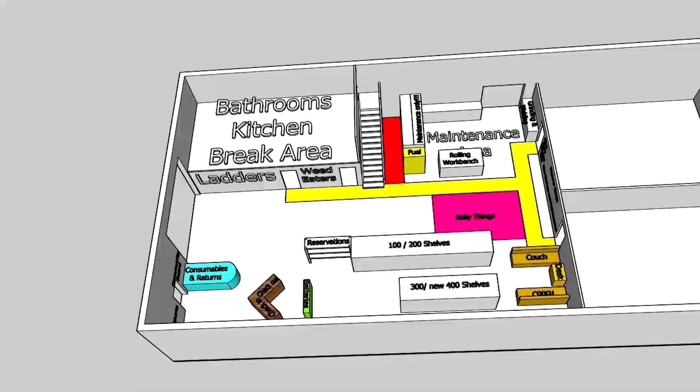If you've been to the Asheville Tool Library, this might look familiar. I used SketchUp to help us map out our initial design plan when we moved in October of 2022. I started using SketchUp about 15 years ago as a general contractor to help clients envision what we were talking about building. Here's a garden shed with a super cute circle window I built a few years ago. SketchUp is just awesome for bringing your ideas to life.

After doing a 3D drawing, I usually export the model to the companion program called LayOut to create construction drawings that can be used on site. You can also create scenes, which are particular views that show and hide whatever you want, and then link them all together to export an animation like these.

This is a prefab shed we converted to be a guest apartment above a storage space a few years ago. I didn't draw the car, but was able to import a standard SUV from the SketchUp 3D warehouse to help give a sense of scale. Here's a house out in Marshall, built in a week-long intensive tiny house building class.

I color-coded everything and used that on the cut sheet to make it easy for everyone to keep busy and know where things went.

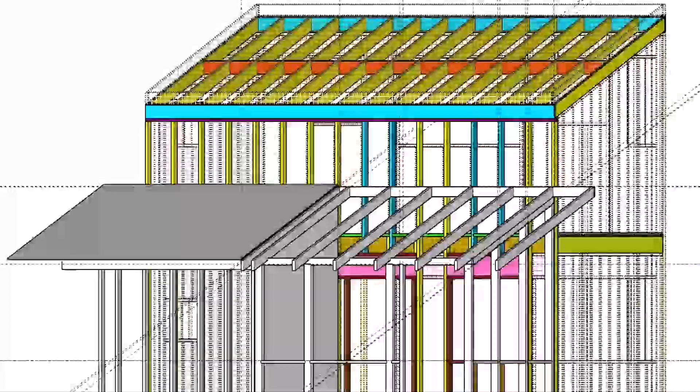And then I got into car racing and decided to use SketchUp to play around with some custom fabrication. I wanted some stronger parts for my rear suspension, so I mapped out the existing geometry, used that to inform and design the new components, flattened the pieces with a plug-in program called Flattery, and sent those to a plasma cutter after nesting as many as I could into a single sheet of 11 gauge steel.

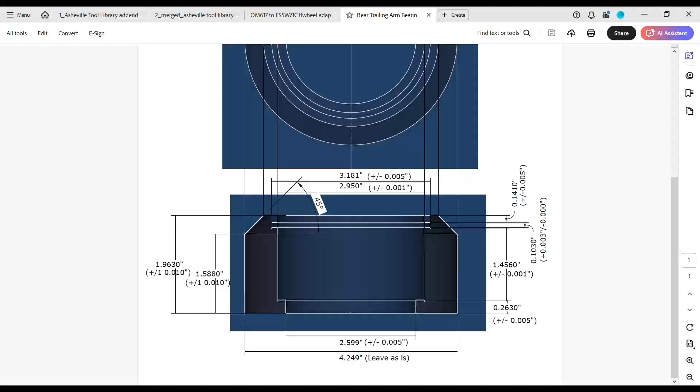I also had to design a wheel bearing holder that I had a local machine shop make for me. This is my first time doing something so oddly shaped, so I was very happy that it all came together as expected, and even better, has withstood tons of abuse. Here it is going off that jump.

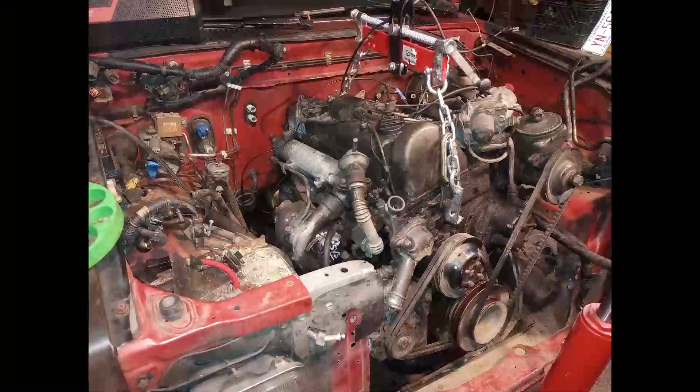Another very weird ongoing project I've got is swapping a 5-cylinder Mercedes turbo diesel engine into my Nissan hardbody, but keeping the original transmission and drivetrain.

So here is the flywheel adapter to get from the new engine to the existing transmission's flywheel. Basically, if you can imagine it, you can probably draw it in SketchUp and bring it to reality. As challenging as it can feel to work things out on the computer, it's so much easier and cheaper than doing it for real. You can use it to walk through all the steps and see what issues you might encounter.

So I'm going to start working off the outline here.

There's SketchUp Free, which is probably what most of y'all have opened up. The desktop version comes in a few flavors, from $150 to 350, up to 750 bucks. I think the free version is great for just starting to play around with it, but you've got a lot more capabilities with the more expensive versions.

They do offer that highest tier, called SketchUp Studio, which usually costs about $750, to qualified teachers and students for 55 bucks. That's the level I'm using. There's a lot of plugins and additional programs that come with that I'm not even using, but depending on what you're doing, you may want to.

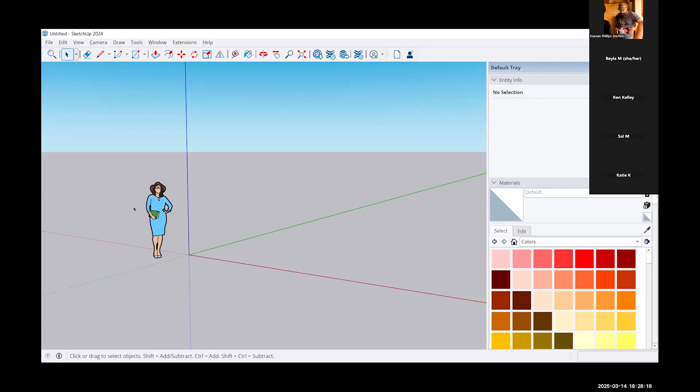They usually will put a model here near the center point of all the X, Y, and Z axes for you. I usually leave that until I've got something else drawn and then delete that, but it can be cool for a sense of scale if you want to have that.

So the first tool that we're going to use will be the rectangle tool. You can also use it to draw squares. The keyboard shortcut is R, for rectangle. I'm just going to go start right at what's called the origin, where all three of those axes come together, and click on that.

I'm going to click and release and then start pulling away, and you'll see I can move my mouse around. If you look in the bottom right corner, you'll see the dimensions, one number and then a comma and then another number. You can try pulling this out to exactly what you want, or once you've gotten it pulled out, like if I want a long rectangle, I'll usually kind of make it look like a long rectangle. So I can see that that first number is 46 feet and the second one is 9 feet.

So that 46 feet is kind of like my left to right dimension. I've clicked and released and pulled over in this direction, and then you can just start typing. So I'm just going to type like 40 feet, comma, 10 feet. And that's going to make a rectangle that is exactly 40 feet by 10 feet.

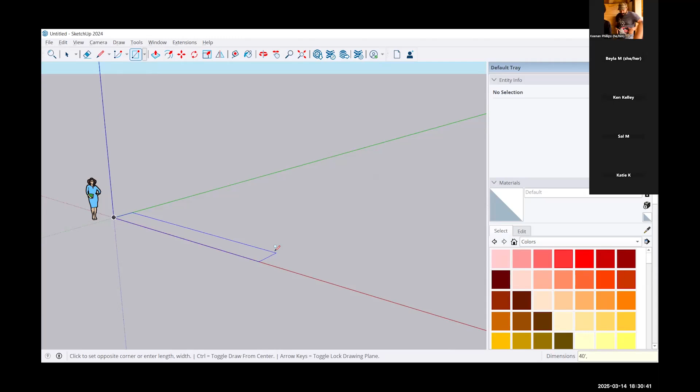Yes, Robin. Click and release is way better. If you click and start dragging out and you accidentally release, it's gonna lock to what you were doing. But actually that can work out. Let me undo. So if I were to click, drag, and I didn't mean to go there, you should be able to still type in your dimensions and get where you wanted to end up with that 40-foot by 10-foot rectangle.

All right, so that's the rectangle tool, and R is the keyboard shortcut for that. So the next thing we're gonna do—it's not letting you type in the measurements. Are you on the free version, and are you able to see that bar down there?

Maybe they have changed that. I'll try, see if my internet will allow me to. Oh yeah, they've changed it. Well, shoot. It's not super critical to do exact dimensions for what we're doing today. Just draw a rectangle that's kind of roughly in that same orientation, or you can draw a square or a rectangle in the other orientation. It actually won't matter too much.

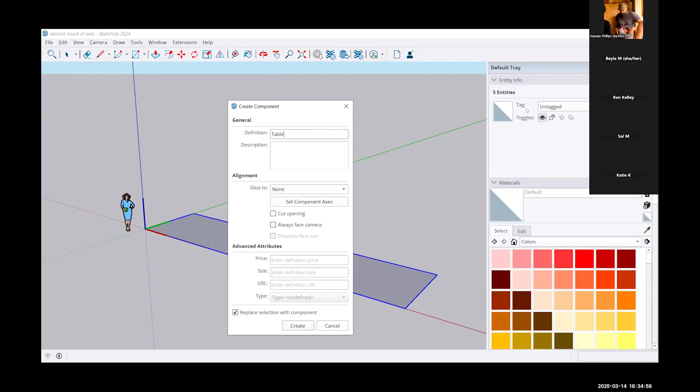So what you've got over to the side here might look a little different with the online version. I think the last time I tried the online version, several years ago, they didn't have this thing called the outliner—they were only allowing tags. The outliner is definitely a super helpful part of the desktop version. Once you start getting more complicated with models, it's very nice to see things broken out kind of in outline fashion.

At this point, I'm going to go ahead and delete that model. So I have two options: one is to just click it over here in the outliner, the other is to click and drag over that model.

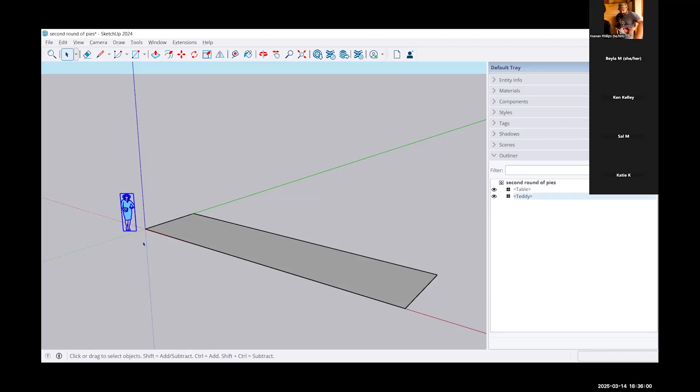Click and drag is another interesting tool. If you click and drag from the left, it's only going to select everything that's within that rectangle that you made—like if I've partially got our rectangle table in there, it doesn't do anything. If you click and drag from the right, you'll see dotted lines instead of solid lines, and it's going to select anything that's partially within that rectangle. So now it's selecting both things.

So I just want to get rid of Teddy. I'll highlight them and then use the backspace key—or maybe it's delete. Yep, delete. And now I'm going to save just to make sure, but you probably don't need to do that because you're online.

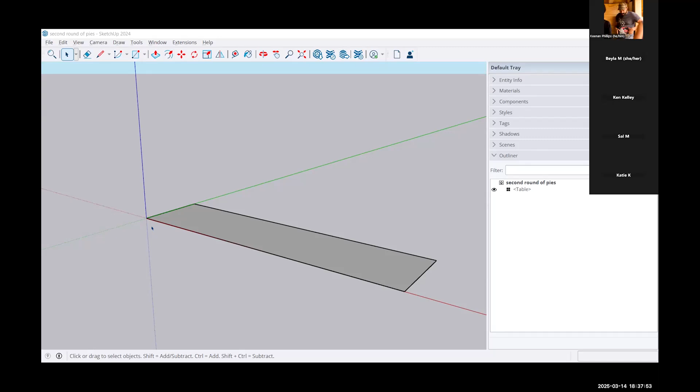So the next tool we'll use is called the Orbit tool. Keyboard shortcut for that is O. When you do that, you'll see the cursor change to this little vertical line with a red arrow around it. Something that's really awesome about the trackball mouse is I don't have to hit O to get to this tool—I actually just click on the scroll wheel, and that automatically takes it to orbit mode.

Then I just move the trackball and I'm able to do what they call orbiting, just kind of move all around—way easier on the trackball. This is probably one of the biggest advantages of the trackball, being able to quickly move around your model. This would take so much longer with the trackpad.

So yeah, you can hit O, and with the trackpad, I believe you have to click and hold, and then you start moving around on the trackpad.

So we should go ahead and create a scene just so we don't accidentally get lost in outer space and have a hard time getting back here. I've got it over to the right in my default tray. You may need to go up along the top of your window to see—I think it's going to be in the tools.

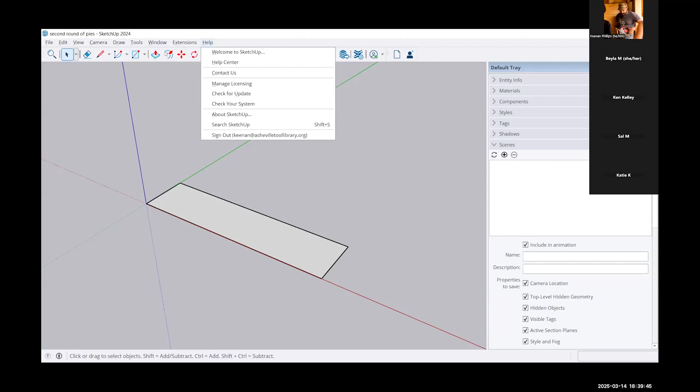I'm sorry, I always use the tray for doing things. I pretty much never use these drop downs or the tool selection along the top edge. Yeah, maybe it has to come from the tray. So over in the tray underneath scenes, I'm just going to click that plus button, and it's created scene one.

Is anybody other than Joseph able to see my screen? It says I'm screen sharing. Okay, I don't know what's going on, Joseph, but most other people are saying they can't see it.

Let me try opening the online version. It was going really slowly for me earlier today. Give it a few more seconds here. Okay, maybe it'll work.

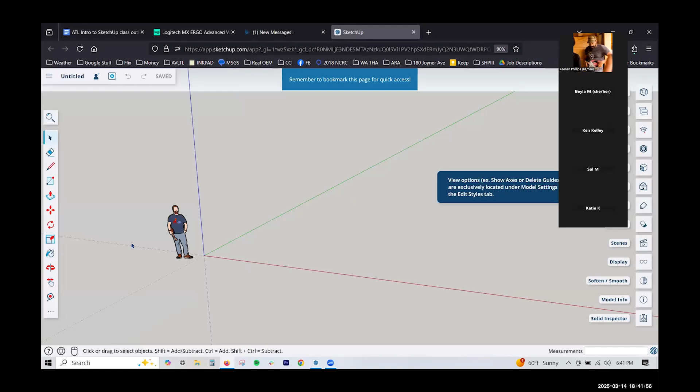Okay, I got somebody with a dinosaur shirt and a ukulele. That's a cool model.

Okay, so gonna try doing what we did before. That did allow me to type in the measurements. I know somebody else said it wasn't allowing them to.

Matthew's saying they also couldn't type in the measurements. Yeah, totally, just let me do that.

Maybe if you're actually trying to go over to that open cell and click there, that might have been the problem.

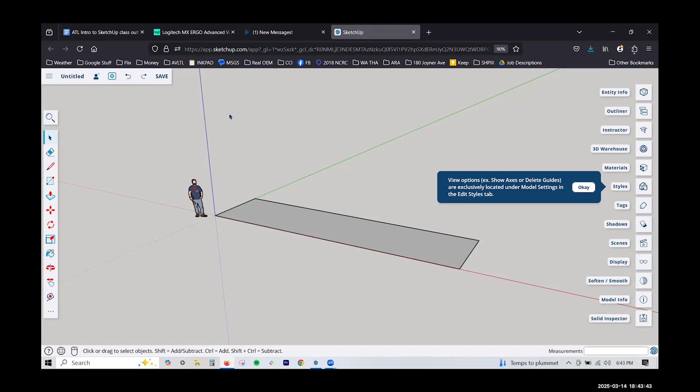It's weird, I'm also not getting that upgrade button, and it doesn't look like I'm logged in or anything. But like I said, it won't be a big deal if you aren't doing these exact dimensions, at least for the exercise we're doing today.

Okay, so orbiting, we made it an individual component. So once something's been made an individual component, if we wanted to draw a rectangle that's actually attached to it, we can't just hit R for rectangle and start drawing on it. Those aren't actually going to stick to each other.

We'll actually have to click into it. So I usually will triple click. Oh yeah, I undid it - that's why it's not a component.

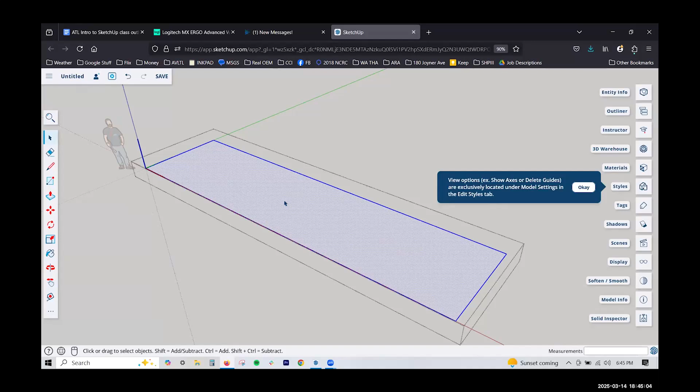So once it's become a component and you triple click on it, you'll see kind of these dotted lines of a cube form around something, and that lets you know you're actually drawing on that thing. So anything you draw on that will be stuck to that object.

So I actually don't want that because we're trying to make some pies that are going to sit on top of the table. And if we want to move the pies around, we don't want the table to also be stuck to them and moving with it.

Okay, Katie was saying it's a little counterintuitive maybe to not try to click into that box where the dimensions are.

All you do is you hit R for the rectangle tool, click and release, and then start moving out wherever you want. Then you just start typing the dimensions. You don't click on that box at all, but they'll pop up in that little dimension box. Katie was saying that worked for them, so maybe try that if you're having issues.

So the next tool we're going to use will be the tape measure. It can be good to actually get a measurement between some particular things. I use it a lot, especially early on, for just making what are called guidelines. To get to the tape measure tool, we'll press T and it should pop up with a little tape measure.

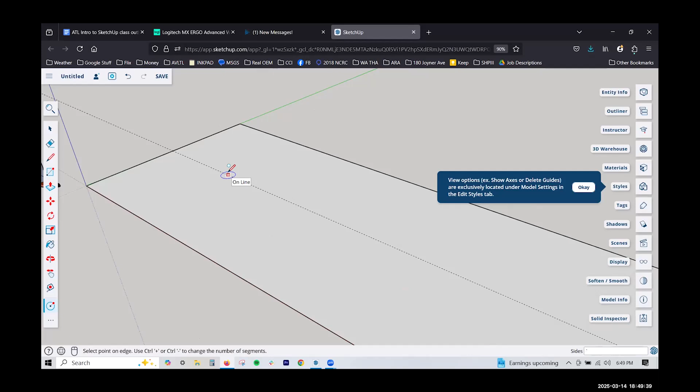Let's just click some random location. So I'm always pretty much always doing the click and release. I've got the circle tool, click and release on the center line, and then you can start moving around. You see how that line from the center is green right now? That lets me know that I'm lined up to the green axis. Not important in this scenario, but it'll become important a little more later.

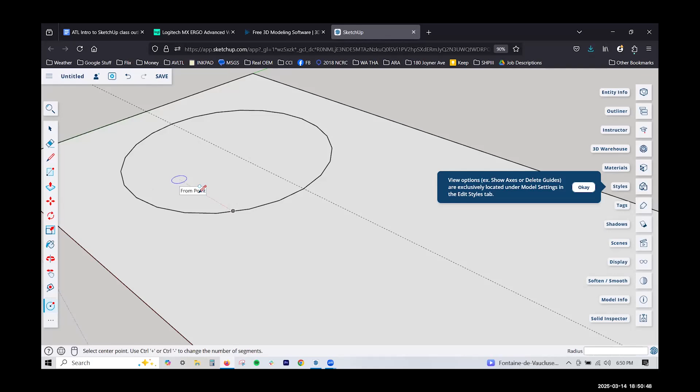So I'm just going to do some random size, it actually doesn't matter. You might notice this circle has some really rough edges to it. Something that SketchUp does to keep things running quickly, especially if you don't have really good graphics processing on your computer, everything is actually made up of a bunch of line segments and little planes as you start getting into shapes. So the less lines it has, the less work there is to do as far as video and graphic processing.

But I want this pie to look pretty good, and that just doesn't look good to me. So I'm gonna hit spacebar to get to the pointer tool. I'm gonna click on the edge of that circle, and it will highlight that circle all the way around. And then I'm gonna click entity info, so it's going to tell you information about whatever you're clicked on.

So if I wanted to change the radius of this circle from 3 foot 1 9/16 of an inch to just 3 foot, it's pretty easy to adjust it here. Just do 3 foot, hit enter.

So that resized it. The segments are the number of lines making up that outer edge. Right now it's got 24. I'm gonna make it, multiply that by 4, so do 96, and you'll see it get a lot smoother. It's still made up of a bunch of lines, but there's 4 times as many. So things got smooth enough that I think it's at least pleasing to the eye.

Oh, so Joseph, to turn the rectangle into a component, you're gonna hit the space bar to get to the pointer tool, and then you'll double click on the rectangle, and then you press G, and it should pop up a little window saying make component. You can type in whatever name you want to use, and then hit enter.

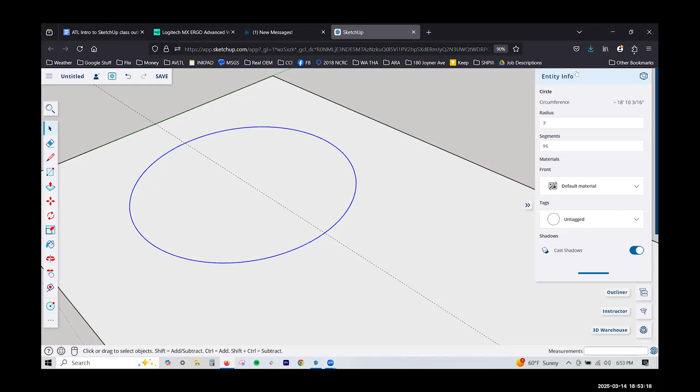Let's actually use the push pull tool next. So to get to the push pull tool, we'll hit P on the keyboard, and we should see this little square with some shape to it and then an up arrow. As you hover over things, it'll highlight them. So now I can see that I'm going to be pushing or pulling that shape that is the circle.

So I'm just going to click and release and then start moving up, and so we start to get some shape. I want this to look kind of pie-like, so I'm going to go about there. That seems to be about the proper proportions.

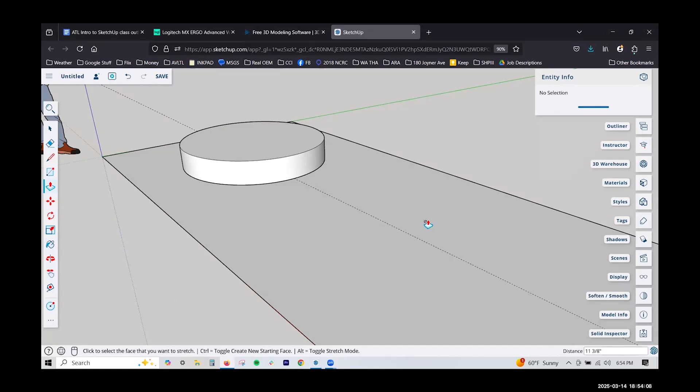Give you a few seconds to make sure everybody's keeping up with that. So that doesn't really look like a pie though. We want that upper edge wider, at least not what I imagine as a pie. You could have a pie in that shape, I'm sure it would taste great still, but I want that upper circle to be a little bit wider.

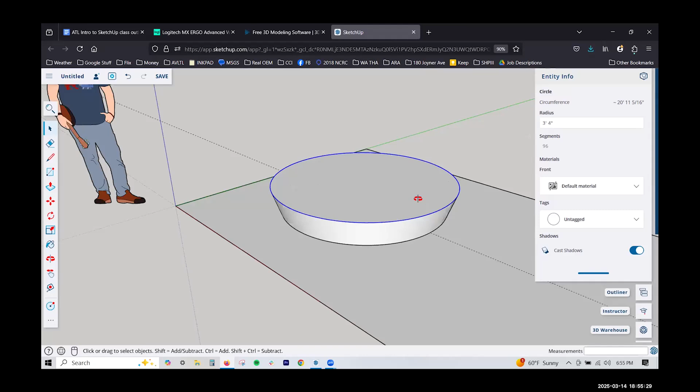So we're going to hit space bar again, and we're just going to click on that upper edge. You should see only that upper edge turn blue, and that lower edge should still remain black. Your entity info window might still be open, but if it's not, you can just click the entity info tool over to the right, and what we're going to do is adjust the radius. Right now the radius is 3 feet, which is like 36 inches, so I'm going to try 40 inches. I think that looks pretty good. So whatever measurement you had there, you can just add a little bit to it so you get some kind of angled shape that you like.

Joseph, make sure you're seeing the upper circle highlighted in blue. If you're not clicked on anything, the entity info will just say no selection. So make sure you're clicked on that upper circle of our little flattened cylinder.

Make sure it says circle in the entity info. Anybody else having issue with adjusting the upper circle radius?

So if it says face, what you've got highlighted is, if you can look at my screen share, the center of the circle. So you have to move that pointer till you're actually clicked on the edge, it's just going to be a single click. If you double click that edge, now it's highlighting the whole thing for me, or if you double click in the middle, you'll get those dots in the middle of the circle, but also around the edge. What you have to do is just click that edge. This can be tricky sometimes in SketchUp, clicking, especially since the edges are so thin, so I'll usually, if I'm having a hard time, zoom in really close to make sure I'm only getting a highlight of that circle.

Krista, were you saying it's kind of working or kind of not working?

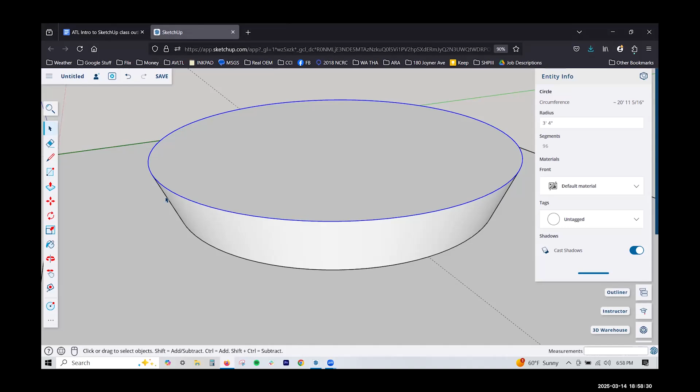Okay, cool. So let's see, what should we do next?

Oh, we are going to do the offset tool because my favorite part of pie is the crust. I mean, it's got to have a good filling, but it needs a good crust, especially sticking up over the edges there. So actually, before I get too much further, I think I might not have even made a scene.

Yep, I didn't even make a scene yet, so I'm going to make a scene so I don't accidentally get lost, and then I'm going to make this pie a component. So you see when I triple click it, it's highlighting only that, it's not highlighting the rectangle because that's a separate component.

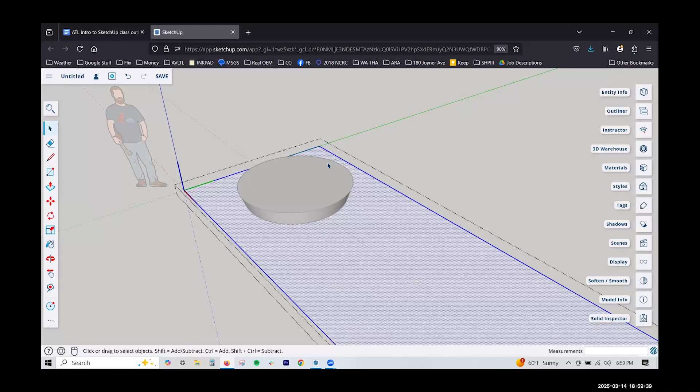Once you're in a component, if you want to click on the pie, it's not letting me, it's kind of stuck in this component. So I have to click over to the side outside of this dashed line box, and then I can triple click on the pie. So triple click on your pie to where you're seeing everything highlighted and hit G, and we'll make that a component. I'm just going to call it pie.

So we are going to use the offset tool to make a little bit of an edge on the top and give it some crust. To get to the offset tool, you're going to use this keyboard shortcut F. Right now you'll see I've got the pointer and it's got a little circle with a line through it. Even though I'm hovering over my pie, it's because the pie is a component, so as I'm hovering over it, I'm kind of locked out of it now. So I need to actually hit spacebar and then triple click it. Now I can hit F and I'm actually able to modify this actual component.

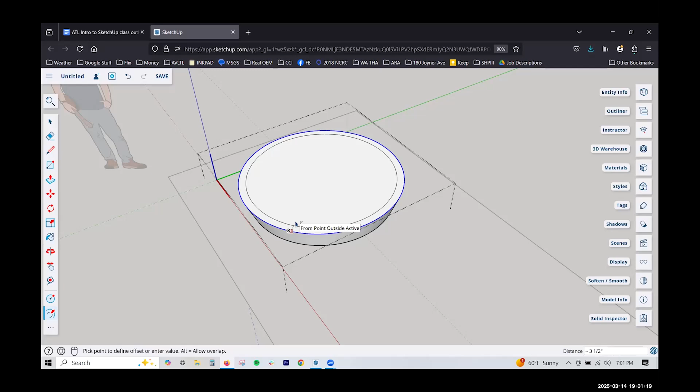So I've got the little red square and I'm going to want to offset from this upper edge. I'm going to click and release and then start moving in towards the center. It can just be a random amount, I'm just going to go that far. That looks good. Man, that's a big pie compared to my person.

Once you've got an offset circle, you can use this offset tool for squares or triangles or really any shape, but we'll just use it here for the circle. So you've got that offset circle, and then we can hit P for push pull.

You should be able to highlight this outer ring and start bringing it up to give a little bit of a crust shape. I had issue with this earlier today when I was practicing—it was only at first wanting to let me highlight the inner circle. If you start doing something you didn't mean to do, you can just hit escape and it'll go back to how it was. You can always do the undo button as well, or Control Z.

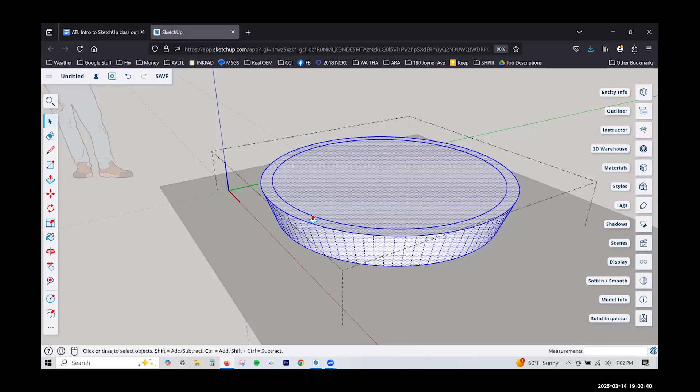Oh yep, I clicked out of it. There we go. So P for push pull, and I'm just going to bring that up, make a little bit of crust.

Katie, to make a new component, you'll triple click on the thing and then press G.

Then to make the inner circle, you'll use what's called the offset tool. Make sure you're clicked into the component. You'll triple click on it once you've made it, and you'll get those dashed lines of a kind of box around it. Then you click F and go to the edge of that upper circle, click and release, and then you can just start moving inwards and it'll make a perfectly even inner circle to that outer circle.

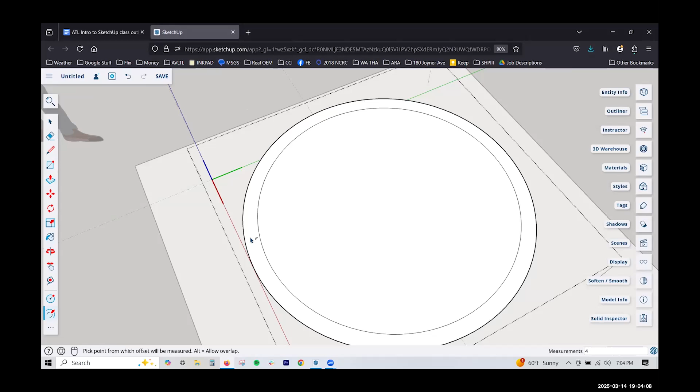Just like we've done elsewhere, you can go ahead and start typing. In the bottom right corner of mine, it's saying it's about 3¼ inches. If I wanted it to be 4, I can just type 4, hit enter, and it's going to make it offset exactly 4 inches from that outer circle.

And then we'll hit P for push pull. Here at first it's not highlighting this outer circle for me like I want, so I'm just going to click this inner one, move it a little bit, hit escape, and for some reason now it's going to let me move that outer circle.

Everybody got crust?

I think we should make our pie look a little bit more flavorful, so we can use the paint bucket. I just want to make the whole thing one color, so I'm going to triple click where I've got everything highlighted.

Then I'm going to hit B for bucket of paint, and you should get the little sidebar popping up showing you some colors. Yeah, so they've got a pretty limited selection in the SketchUp free version.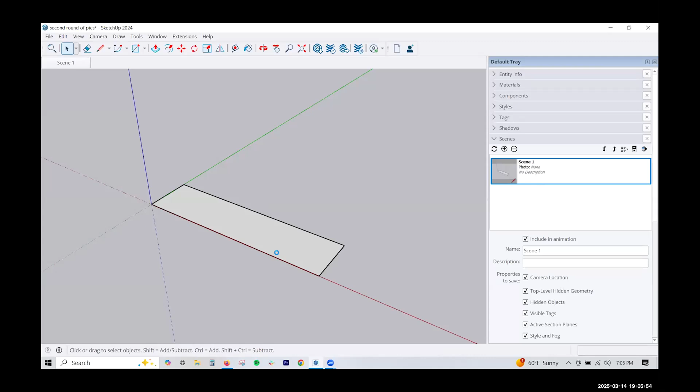In the pro version, you have options of—well, here I've got it open still—colors or patterns. That didn't work well. Or I can do stone, or I think the glass is pretty cool because some of them are actually pretty translucent. You can also edit them to adjust the opacity, and adjust all kinds of things.

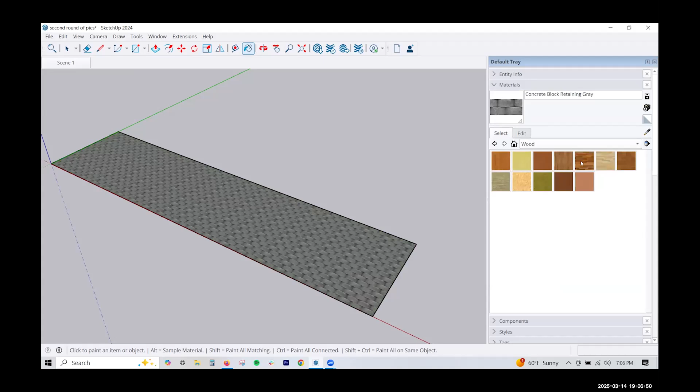Somebody mentioned wanting to do landscaping, so this is great for that—can do some gravel or some grass or some pavers, can do metal, wood, all kinds of stuff. They've got all kinds of preset stuff. Also, if you want something super special, you can import a picture of something and make it work as a pattern in SketchUp, but we are not going to get into that today.

So let's just use a simple color. I'm going to go with this peachy one. All right, that looks a little better.

Thanks for helping each other troubleshoot, y'all.

Okay, so I think it's about time to eat some pie. What do you think?

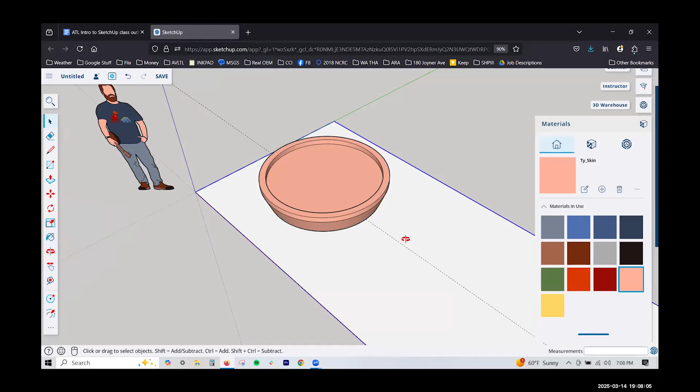So I want to take a slice out of this pie. We will use the tape measure tool to make some guides. One cool thing about the tape measure tool and circles is it will also find the center of that circle. I want to take a nice slice out of this pie because it's so pretty.

As you're moving around, you'll see once you get close to the center, it'll usually try to jump right to the center, and you can see the little bar pops up saying center in pie. So I'm just going to click and release and then start moving—you can go in any direction, but I'm going to go along the green axis, and that'll make sense why in just a second.

I'm not going to go all the way out to the edge for now, just making that line there. If I wanted to make that guideline go all the way across the pie, I would do it by clicking on this green axis over here with the tape measure.

So click and release. When you click on an actual line, it's going to create a line parallel to that one, which can be super helpful, like we did earlier with finding the center of the table. Whereas when you click on a point, like I did before for that slice out of the pie, it only made that little bit of section that I was tracing out. So clicking on the green axis, and then I can just go to that line I made. And now I've got a nice line across the whole top of the pie.

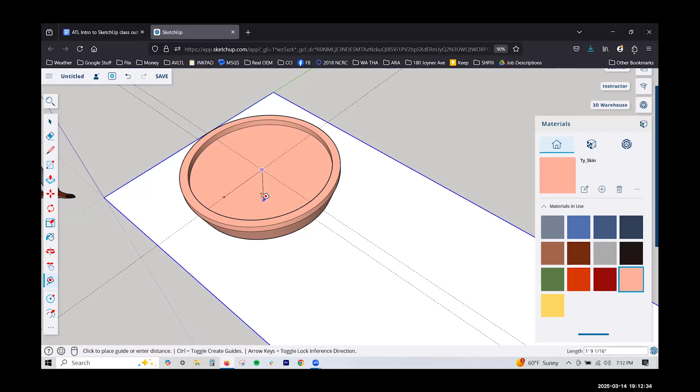So we could just start at the center with our tape measure and just say, that looks about right. And that's fine if you want to do that, but it's a great chance to show another tool. So I'm starting to say that those lines are 90 degrees to each other.

We will use the protractor. Maybe you remember that from school. There's not actually a keyboard shortcut for that, so I think we'll need to click on the 3 dots down at the bottom of the toolbar on the left, and you can click protractor.

So if you hover over the top of the pie, it should click right in the center, and you'll see that the protractor is kind of laid down flat along the top of the pie. I was gonna wait to get into this alteration, but I think it's a good time to do it. So you can use the arrow keys to adjust the orientation of that protractor, so it's correct and does what I want it to do here, which is give me a line along the top edge of the pie.

But if I wanted a line coming out of the top of the pie, I could play around with the arrow keys. I think up, nope, left arrow. So now you can see that that makes the protractor kind of sticking up out of the top. So I could use that if I want a line like this. Or the right arrow is going to make a line in that direction. So sometimes it's just going to naturally only let you do things in one orientation, and you kind of have to use those arrow keys to pull out of that.

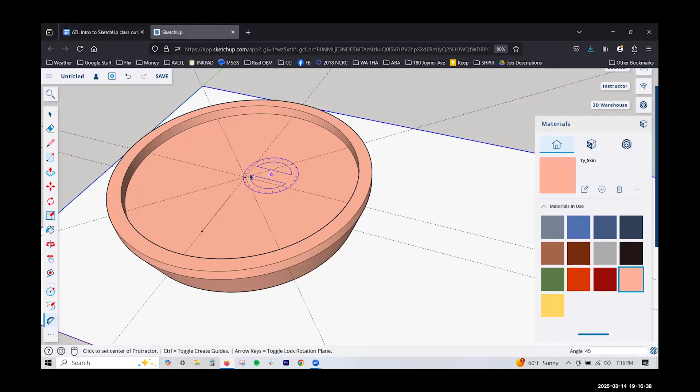Sometimes it could be just, especially with the internet-based version, just kind of reacting slowly and not getting you that center point.

Okay, so hopefully everybody's got their dividing lines. If they're not perfect 45 degrees, that's okay. We just want to make sure they're going all the way out and beyond the edge of the pie.

So I wasn't double clicked or triple clicked into this, and with the guidelines, that's okay. Now I'm going to triple click because I want to make sure I'm modifying the actual pie. So you'll see how the guidelines kind of fade out - that's what happens if you're drawing guidelines without being in the component.

So if I need them to be a little darker to be easy to see, I can just hit T for tape measure, click on that line anywhere, and then move over and click again, and it'll remake that line right over the top of that one for me.

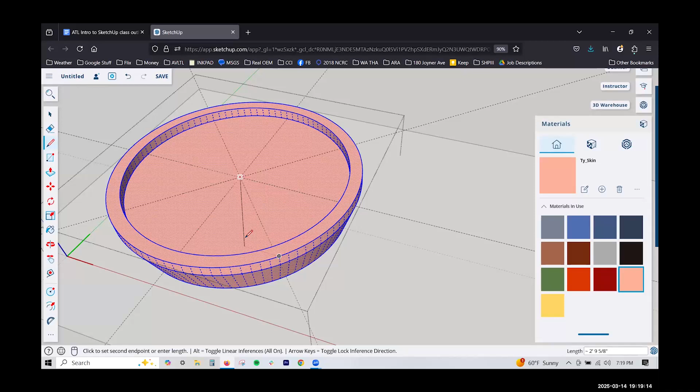So I'm using the line tool right now, and if you don't have a trackball mouse, what you can do is press O and orbit to where you can see it. What I'm able to do with the trackball is press the scroll wheel, move the trackball, and as soon as I release those things, it goes right back to using the line tool. But if you press the O button and orbit to where you could see, then just hit L again, and it should resume where you were with that line tool.

And sometimes you have to do that - like you can't start at the point you want to start at and see where you want to finish that line. So that works. It should work with pretty much all the tools.

So I'll bring this line out to the edge of the crust, click and release, and then I'm just going to go up. I've got these kind of dashed guidelines already. Click there. Oh, it didn't make it.

So I've got to come back to this endpoint of that first line, click release, and you'll see that line coming out if it's actually drawing a line. If you're not seeing that, then you're not actually drawing a line. So click and release again, and then like see here, I'm just getting these dashed lines sometimes.

That's kind of letting me know some reference points. So I'll click and release. Oop, you gotta be careful of that. Sometimes see how it jumped, my mouse jumped just a little bit right as I clicked, and that's a lot harder with a trackpad to avoid. Click and release there, and then start going outwards.

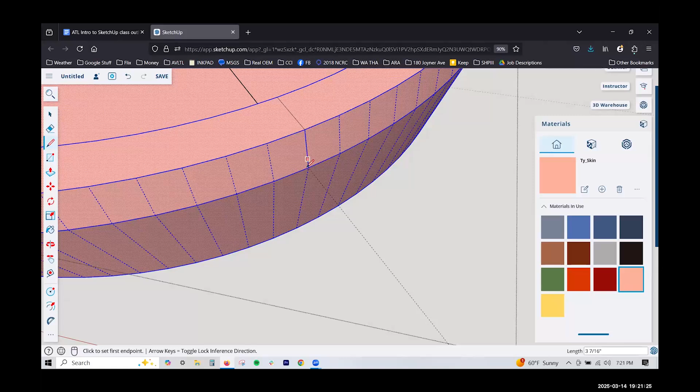And I'm going to do a little bit of orbiting so I can see a little bit better that this dash line here is lining up with the slice line, and I want to click to that endpoint. And then we'll click and release again, go down that dash line. So you can see how that dash line now turned into a solid line.

And then we'll go down the outer edge. And then we'll go from here. And like this is another case where I've got to orbit to the underside. Hopefully it will find the center. But it doesn't seem like it wants to, which is great - we can learn another skill here.

So I'm going to come back to the top. I want to get a line poking out of the bottom of the pie that is centered. So I'll hit T for tape measure.

I'm just going to find a line that I know is vertical. This blue axis line here, that's vertical. Click and release it, then start coming over to the center of the pie, and click and release again. That'll make a line so I know if I draw a line to there, that's going to be right to the center of the pie, and then I can draw a line from there to the top side to keep working on my slice.

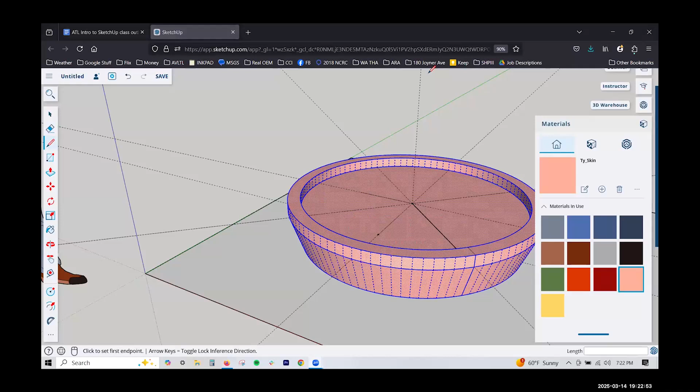Y'all are quiet. I hope that's good.

So, line to the center, and just make sure before you orbit back up to the top that you have that line drawing function going on. We can't see this one, but it should be there, a line going right through the middle of the pie.

So we can't take a slice out yet. We need to basically do that whole line sequence again. I'm just going to go to one of the sets of dash lines next to the ones we just did and do that whole thing again.

How's everybody doing?

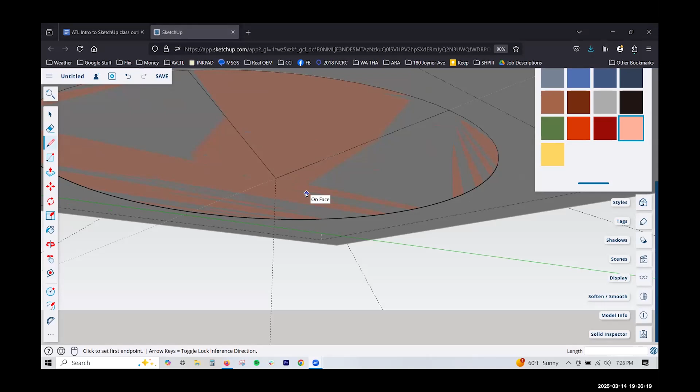Well, now we can hopefully take a slice out of this pie. Anybody got ideas as to how we might do that?

So we will use the push-pull tool. It would be hard to make that a component because it's going to want to connect to everything else. If you triple click on it, we might be able to, with the pointer tool, select from the left. That might work, let's try it.

So I did selecting from the left and only made sure that the slice was in there. Let's see if we can make it a component. That seems like everything I want is highlighted. I hit G, call it slice.

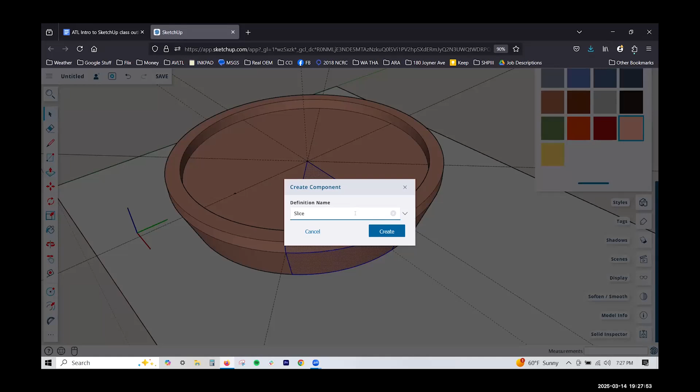Whoa, that's not good. Undo. All right, good try. I like the idea. I'm going to use the push pull tool. So P for push pull.

Oh, how did I do this earlier? I guess that's not... oh, no, that's not what I did. Let's use the erase tool.

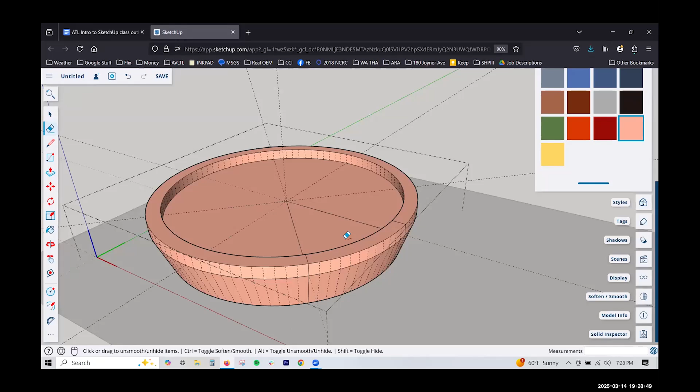So to use the eraser, I'll hit E, and you can click and hold and then drag over things, but sometimes it's a little safer to just click on them to make sure you're actually deleting what you want to delete. So seeing that blue highlight, I'll hit that and then hit delete.

Hmm. Well, that's not working for me. Eraser working for y'all?

Seems like... oh, sure hope it saves that. It crashed.

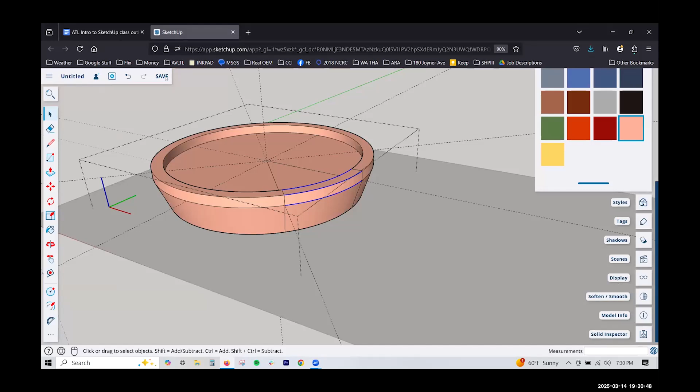Yeah, this is why I don't like the cloud-based system. I don't have great internet usually.

All right, well, I'm just going to try.

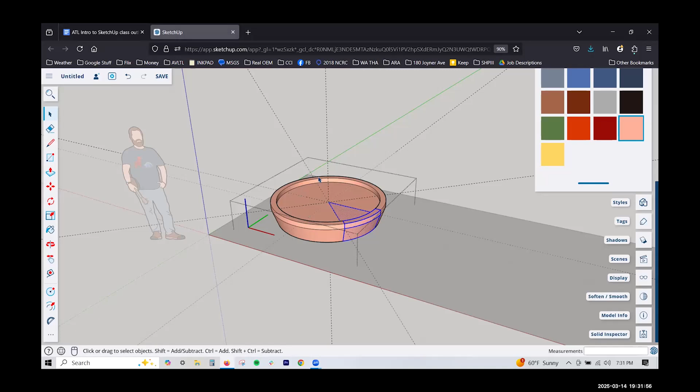Bela, I will try that in a minute, but it actually did not work out well. I was using the pointer tool, so you press space bar and click and drag from the left to only select things within the square that you make. So even though I've got some of the rest of the pie in that square, it doesn't have the entirety of those other parts in there, so it's only going to select the slice.

Let's try just moving it. Yeah, so this is what happens when you try to move something when it's stuck to the other stuff. It's really weird.

I'm trying to hit escape, but it's not happy about that. So I'm just going to do it and undo it, hopefully. Boy, this is getting really unhappy. I'm going to try refreshing this and hope that it comes back.

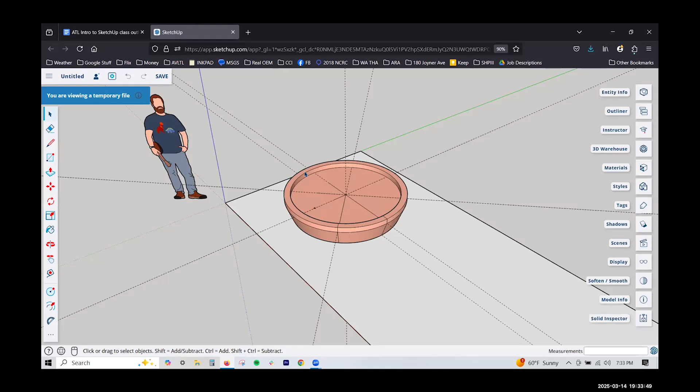So I'm going to triple click, make sure I'm actually in the component, and then press E for eraser and just start dragging over the parts that I want to go away. And there we have a slice of pie eaten. Not as satisfying as actually doing it, but... hmm.

So I'm going to let y'all screen share. Sal, will you try screen sharing? I'll make you able to do it. Okay, go ahead and try, Sal. Okay, um, so...

This is awesome. I'm glad to see you've been playing around with materials and stuff. So the dotted lines are just the guidelines. Will you zoom in a little closer?

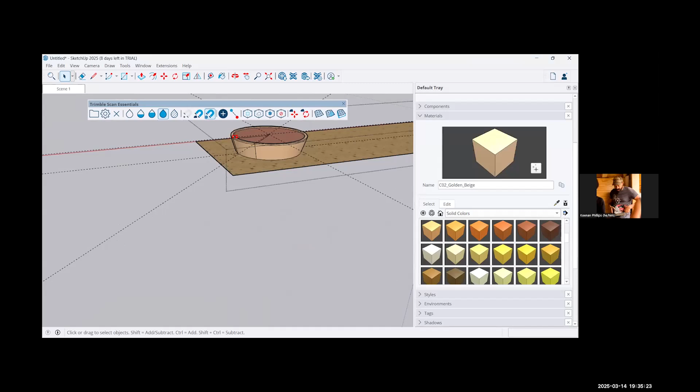And so with zooming, wherever your cursor is, that's going to be kind of the focal point of where you zoom to. So I was mentioning that can be a helpful way to get some side to side movement. Oh, brick pizza, my favorite.

Um, it looks like you might have things correct. Try triple clicking on the pie.

Okay, so I think maybe your lines got drawn without being actually in the main component of the pie. Try clicking off to the side outside of the dashed lines, and then triple click on the pie.

I think you may have just done that. Hmm. Yeah, so it doesn't look like everything is all one thing. If you triple click on any of that and it's all connected, it should all highlight. But it seems like... oh, there you go.

Yeah, okay, there you go.

Try clicking delete now, see if you can get that piece to go away. That's going to erase probably everything since that was highlighted. Just do a single click on... oh, well, you got to triple click to get into the component.

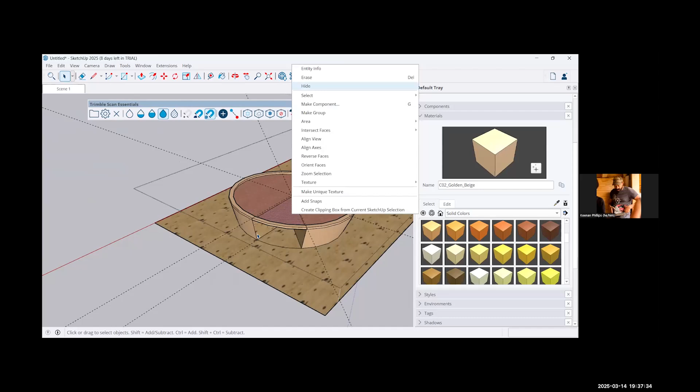I think you had double clicked, so the lines along the edge also got deleted. Just do an undo and single click. You can also just hit E for eraser, and just drag over it. You can drag right past it like a normal eraser too, and it'll delete whatever you touch, but sometimes that accidentally does bad things. That's awesome.

And you can use the paint bucket to color those inside edges if you want.

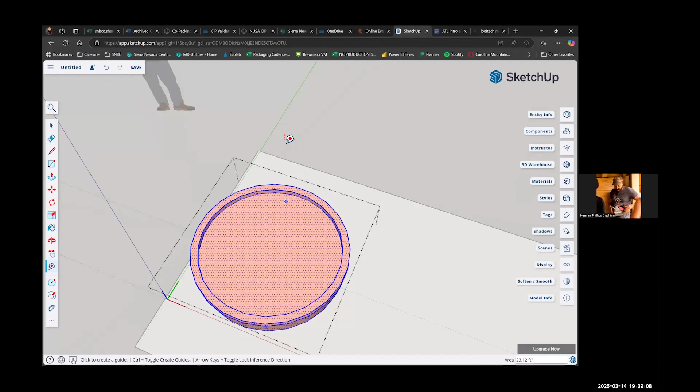Your lines are drawn without actually being on it. If you can see the screen share right now, the dashed lines are making that cube all the way around the pie. That lets you know you're actually drawing on the pie. If you don't draw those lines actually on it, even though they look like they're on top of it, they won't work together. So you should probably just erase those lines, then triple click into the pie and draw them again.

There you go, Matthew.

You can unmute yourself if you want and talk through what you're doing too.

Okay, I'm not sure if you can hear me. I triple click the pie. Okay, and then I'm back at trying to put the tape measure through the center point of the pie.

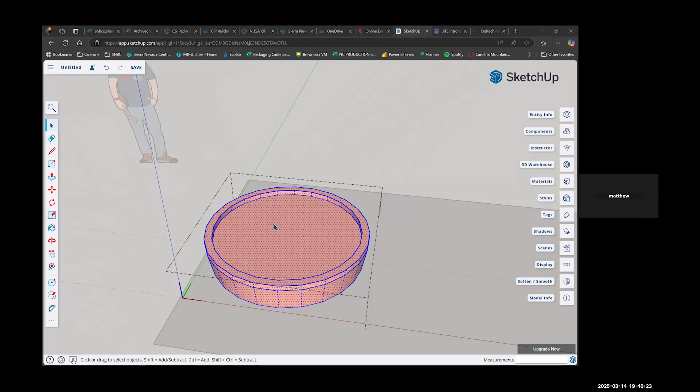Hit T for tape measure, and then go to that. You can go to the blue axis line to the left. Click it anywhere, just click and release. There you go, it's jumping right to the middle of the pie. So click and release again, and then you can use that to draw.

Actually, probably what I'd do is hit escape, and then you can click on the red axis line, click and release that, and then you'll want it to actually hit, there you go, where it makes that X. And then you can do the same thing with the green line.

Sometimes the functionality of it jumping to things is great, and sometimes it makes it really hard to actually get to what you want to get to. So sometimes you've got to zoom in really close to just make sure it's actually clicking to what you really want it to click to.

First you'll click one of those dash lines that you just recently made to let it know what you're referencing. Click and release, and then there you go. Now you can just type 45 if you want, but it's also just trying to click right to it. Yeah, you got it, nice.

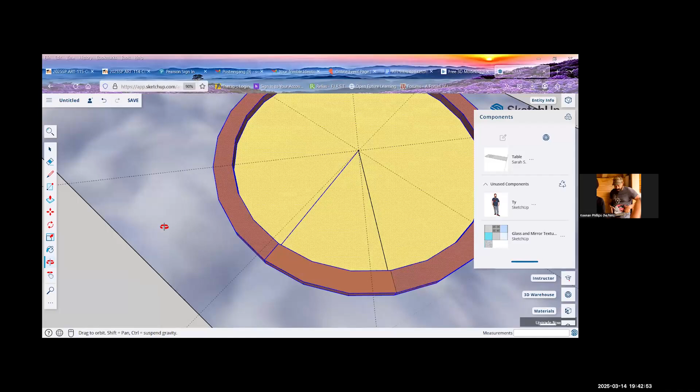I think your lines... so did you redraw those lines, Sarah? I'm letting you unmute if you want. Yeah, I redrew them. I don't think they're coming up again though.

Okay, so just click on it. We want to keep the lines because if we delete the lines, we just kind of lose that defining edge. But if you click in the middle of that pie shape, just a single click... oh yeah, it looks like the lines are still separate. You see how the whole top of the pie is highlighting? If those lines were actually on top of the pie, it would highlight everything other than the pie area. So I would delete those, and then make sure you're triple clicked on the pie, and then you can draw the lines.

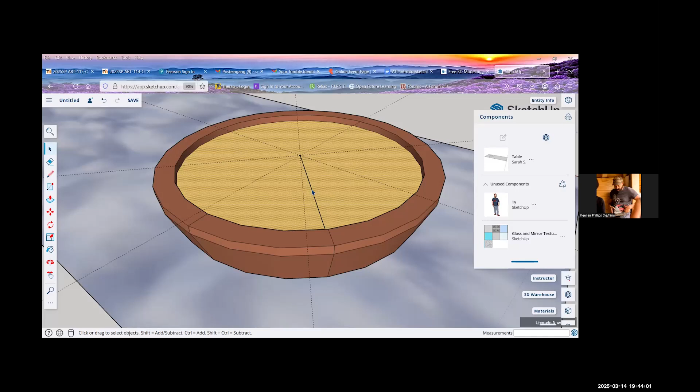While you're doing that, I'm going to make sure other folks are keeping busy. We're going to try the move tool.

First thing we want to do is hit spacebar and triple click our pie, making sure everything is highlighted and we've got that dashed line cube around it. Then we'll press M for move. In this case it doesn't really matter where along the pie I click, but sometimes, like if these were the wheels of a car and we knew we wanted them exactly 100 inches apart from the center of one to the center of the other, I'd probably click right at the center, click and release, start moving, and then type in 100.

I actually want to make a copy of this pie. So even though I've started moving the one, I can still make a copy of it. All I do is hit Control, which maybe on Mac is Command. And now you can see I've got two. So I'll just move over in this direction, pretty far to the edge of the table, then click and release.

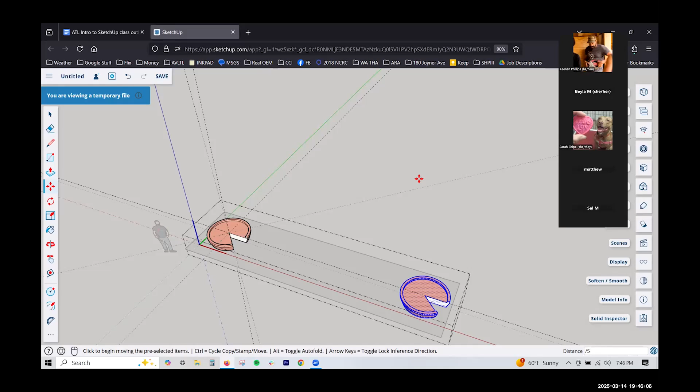But then let's say I wanted that whole table covered with pies, because of course. So I clicked and released after moving that one, and before pressing anything else with the mouse, I can just start typing. I'm going to type divide, and you'll see that pop up in the little text box in the bottom right. I'll say divide 5, and that'll evenly space 5 pies between those two. But that's a little too many, so I'll just type divide 4. That looks better. So that's one way of doing that kind of copy.

The other thing I could do with the move tool - we don't have to be clicked in when we're moving, we just have to have it highlighted. So now I've got these solid lines around it, letting me know I've selected that whole thing. I'm going to move that whole thing, so M to start moving it. But oh yeah, I wanted to make a copy, so I'll hit Control.

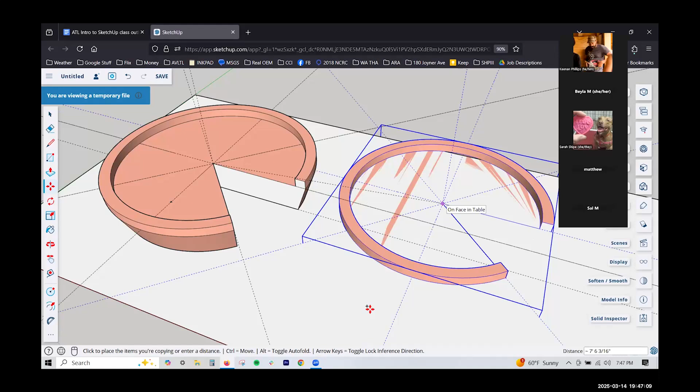I'm just going to move it along the red axis till it starts to clear that other pie. If you're having trouble getting it to move right along the red axis, you can use the arrows - I think the right one locks it to the red axis. Even when my mouse is way over to the side, it's saying I'm only moving along that axis. Or I could use the left arrow for the green axis, or up arrow, which only moves up and down, but I want to keep it on my table. So I'm going to move it until it's clearing the other one just a little bit.

Then I can type in the asterisk symbol, which is over the 8, and say times 5. That's a few too many, so let's do times 4. Something like that is super helpful - like if you're drawing a house and need a lot of studs along a wall, using the common framing spacing of every 16 inches, you can move one stud over 16 inches, then say times 20, see that's a little too long for the wall, try times 18, and see what works.

Sarah, did that work out for you? No. Well, yes and no - I can't erase just the pie. I'll show you.

Thanks for joining, Trista. Glad you learned something.

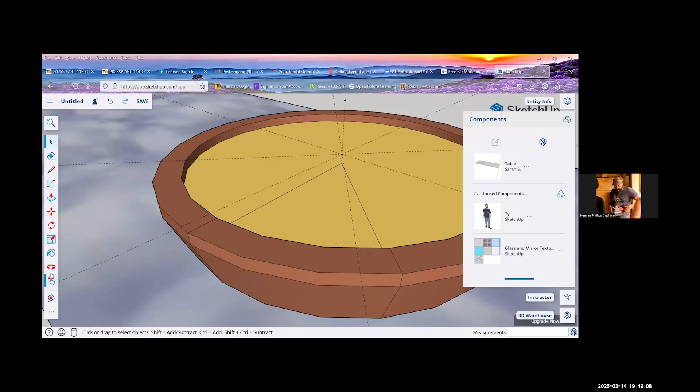Okay, yeah, so you've got just the pie. So what happens if you hit backspace or delete? Here, yep, so yeah that. Okay, so your lines I think are still drawn outside of the component, so you can leave the lines. Just triple click on that pie, hit spacebar to get the pointer. Oh, it doesn't look like this is actually a component.

Try clicking just in the middle of that slice, just a single click, or a little over to the left, not right at the point, like if you were putting a fork in the middle of that slice. Yeah, there you go. Okay, now click delete.

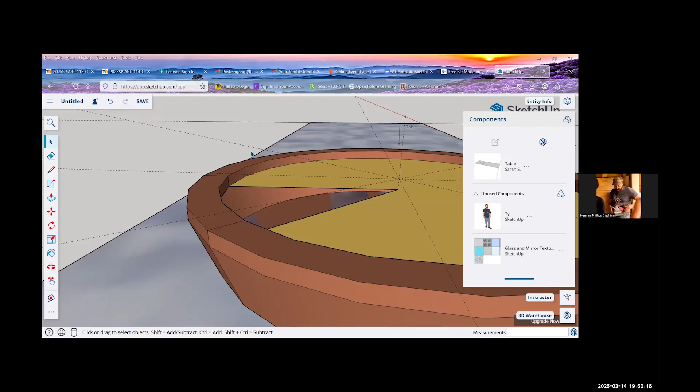Okay, I think that's working now. The reason it's hollow in there is because there's not a line. You can leave that, go ahead and do redo. You need a vertical line right through the center. If you orbit, you'll see you don't actually have that there. So you just need to add that line.

You can also try with the eraser, just dragging over it. Oh, there you go. Yep, and then you need... perfect. Cool, good job.

How do I delete the lines though? What's that, how do I delete the lines? So you can just press E for the eraser and just drag right over them.

My commands have been working, by the way. Command, yeah. Like the E and oh, you don't have to press command, you just press the letter. I'm not getting it though when I just press the letter. Oh, I was at first and then something happened, I don't know where it stopped.

I have found that to happen with the online version. Sometimes it just stops working for me, so you can save and refresh. Beyla said that they had to reload. Are you still having issues with the copy move though? When you, Beyla, I'm gonna mute you and stop your screen share, Sarah.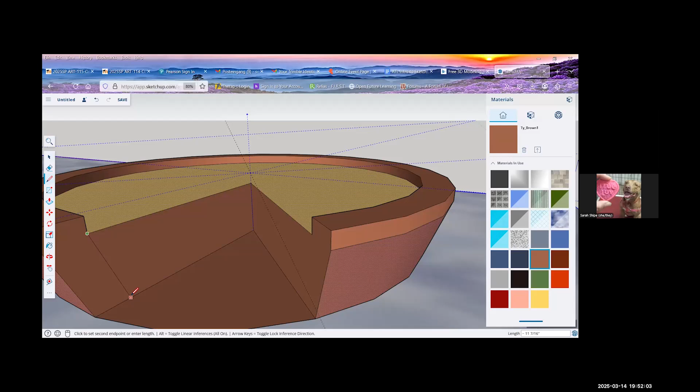Sure, go ahead Beyla, if you... well, you can just screen share. Just a second to stop that one. Okay, you want to try to screen share, Beyla? Let me see, I don't know if it'll let me. Yeah, I don't have the permissions to screen share apparently. Hmm, okay, well...

When you press M and you've got the move tool, yep, if you just look at the bottom bar of the window, it'll tell you what keys to press to do different things. So on mine, Control is copy or move, and the arrow keys will toggle locking it to that particular direction.

Does yours say to use command? No, it says to use option. Okay, and it worked when I used option. Awesome, yep, a Mac user. Yep, awesome.

All right, so we've got all these dash lines now, which are kind of distracting. You may or may not have that many dash lines, but what I want to do is get rid of them. I don't know exactly how to do this in the online version, we're going to figure out.

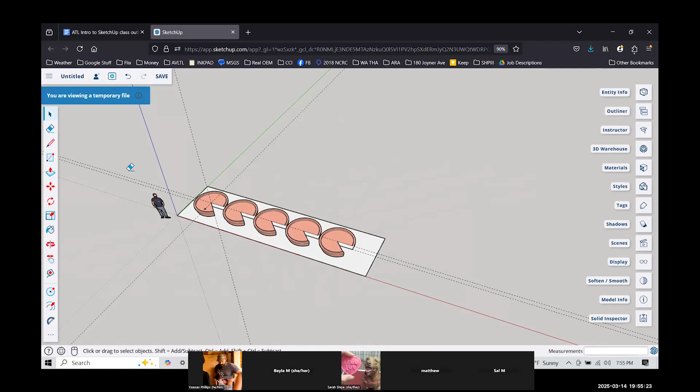All right, that kind of works. So since most of those guides were drawn in the component, I had to go into the component to actually be able to delete them.

We'll play with the rotate tool next. Yeah, we'll do the rotate tool. Um, so it should be Q. We're gonna just triple click on one of them and then press Q, and we get something that looks pretty similar to the protractor. This is again one of those cases where the arrow keys can be super helpful.

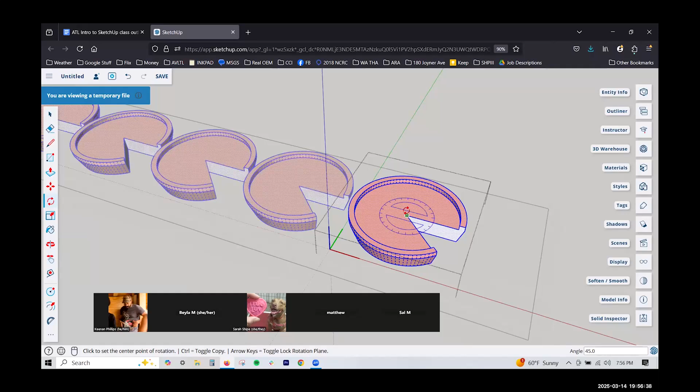This is probably the way that I want to rotate this pie. And what you'll see is it's moving them all, we got Pac-Man going on. But maybe I want to rotate this pie in a different direction. So I could hover there and then press the right arrow.

And then be able to rotate them upside down if I wanted. But I might just want to have only one of these pies move and the rest stay how they are. So I'm going to get the pointer with spacebar, right click - oh, it's in my way. Should be able to do a function called make unique, but online might not let us do that. Yep, might not be able to do that.

In the desktop version, you can make a particular thing unique from the others. That would allow us to rotate just this one but not the others, or make this one a different color. Sometimes you want to do that, and sometimes it's not what you want. Like if we wanted the inside of them all to be yellow, you just make one yellow, and now they're all yellow.

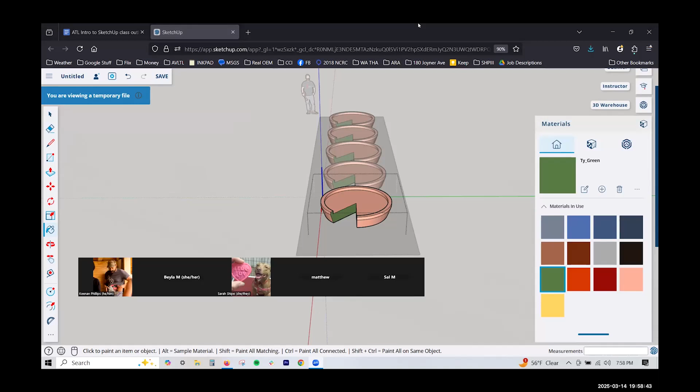That'll let us know that they do a 7-day free trial of the desktop version. And Beyla is able to rotate just one - I don't know how you're doing that.

There's just, oh yeah, two more tools I was going to show you. One tool is the scale tool. So we'll triple click and press S, and you get all these dots popping up.

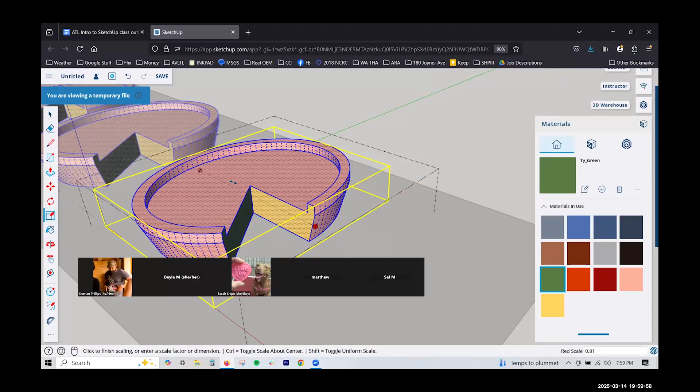When you go to one, it's going to show you how it's going to scale by highlighting in red the opposite corner or side you're going to be scaling to. If I click on this top right corner, it's shrinking height and width proportionally. But I might just want to do side to side only, so that's just going to smush it in one direction but not at all on the other. Or if I want to go side to side but also have the top proportionally shrink, I could do that.

Sometimes you want to flip something, and this is one of the ways to do it. You do the side to side, and you start moving, and you'll see in the bottom right corner we have that text box again. It's already automatically popping to -1, but if it weren't, I could just type in -1 and it just flips it for me.

And then the other tool I was going to show you.

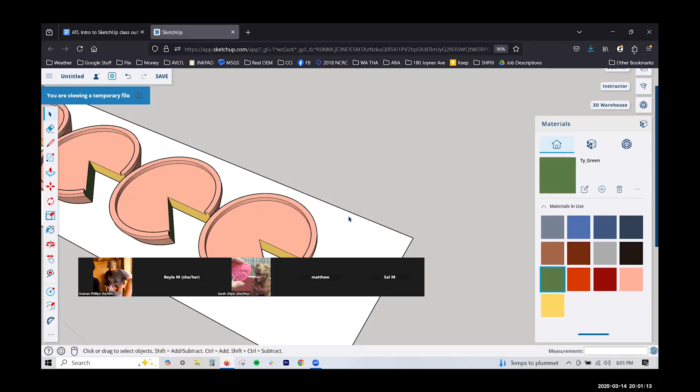Beyla figured it out - you can make it unique by clicking on one without triple clicking, then right click, and you can make it unique. Good job, Beyla. So yeah, I can do what I was trying to do, hitting Q and rotating just this one, or doing different colors on just the one. Whoop, the whole thing. All right, it's blueberry pie. Super blue.

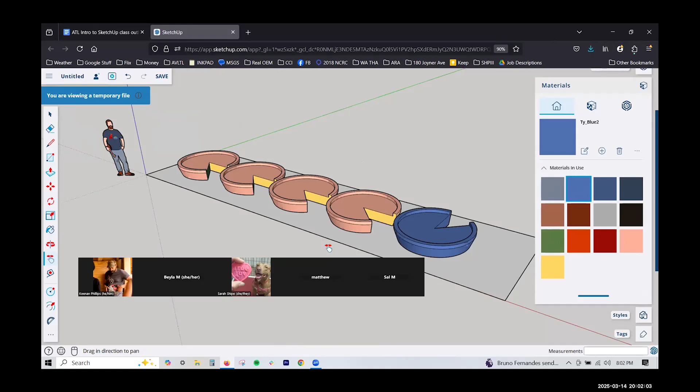The other tool was the hand tool - another tool for moving around. Press H, get a little hand, and it's helpful for direct side to side moving. But usually what I'll do, like if I want to zoom in on the blue one, I'll go far away from it and zoom out so I can get the blue one in the middle of my screen and then zoom in on it. I've got the scroll wheel, so that's just faster and easier for me usually. And I'm also kind of combining that with orbiting.

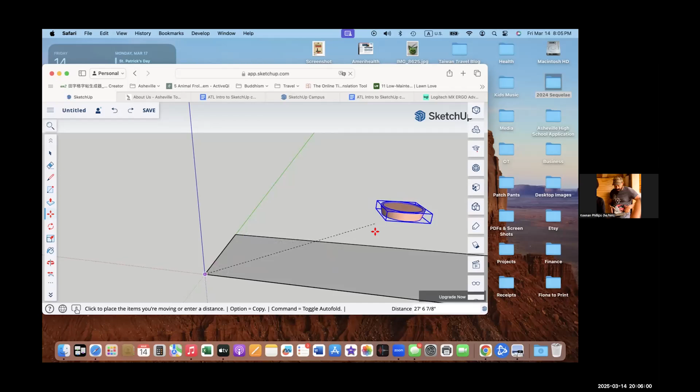So sometimes you want the corner of the table to be your reference point or something like that. That can be super helpful.

So I hit option, that makes it copy. Or if you're like, oh, I actually didn't want to copy, just hit option again, and then it's just moving it.

And then wherever I click, it will be there? Yeah, try that before you do it, or you can make a copy of that one. When you've started moving it, just click one of the arrows, the right or up or left.

Shoot. Okay, so hold on a second. Click it. Yep. So can I click here? Sure. Okay.

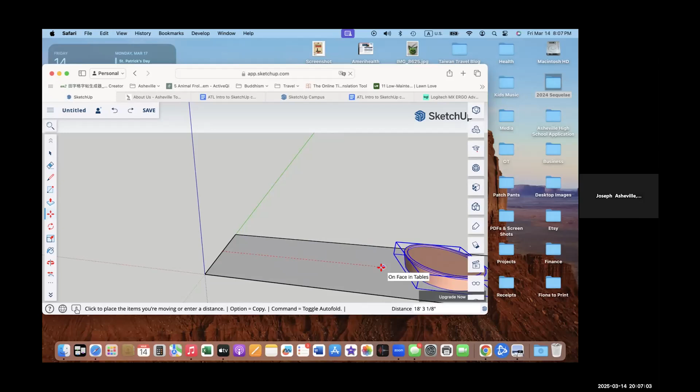So if I hit the right arrow now, maybe. Okay. Oh, there you go. See how much more bold that red dash line got? So even if you move way over, forward or backwards, it's going to stay locked, only moving perfectly to the right there.

Or you can try the left arrow, I think that'll lock it to the green. Yep, and then the up arrow will lock it up and down. Oh, wonderful, I see.

Okay, so how do I do like, if I'm doing basically girders or something like that, and want to make a whole row of them?

Sure, so maybe move the one you have to where it's pretty close to the first one. There you go, and just click and release. And then you'll do Shift and the 8 key to do the asterisk, and then try 5 and then enter.

Okay, so that's if you know how far apart you want them. The other thing you could do is move that copy to the edge of the table. So if you want to undo a couple times.

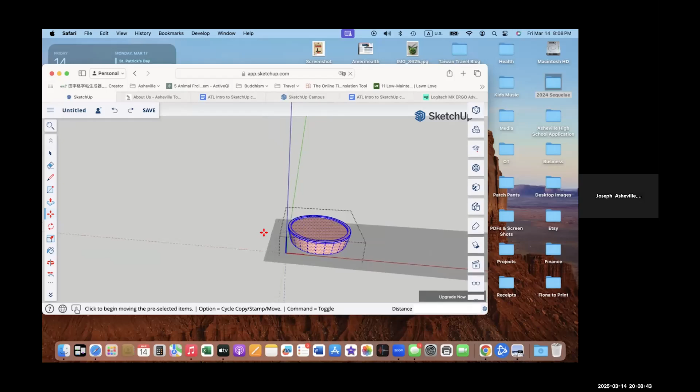Let's see. And then go ahead and hit the option. Yep, and then if you zoom out, there you go. All right, go right there.

And then you're going to type divide, like that. Yeah, there you go. Oops, anyway, okay, I got it now. Thank you so much. Of course, really appreciate this. Absolutely.